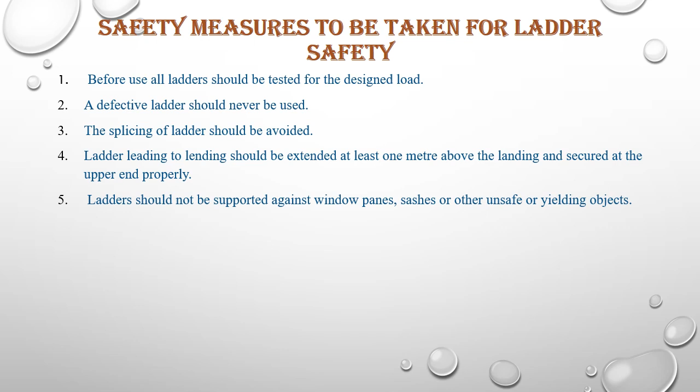Ladders should not be supported against window panes, sashes or other unsafe or yielding objects. When ladders are used in public walkways, a suitable barricade should be provided. While using a ladder, one should not lean sideways more than 30 cm. While ascending or descending, the user should face the ladder. To prevent slipping, a ladder should be placed so it does not make an angle lower than 75 degrees with the ground.

The last one: the metal ladder should not be used around electric circuits or equipment. So these are some of the important precautionary measures to be taken for ladder safety.

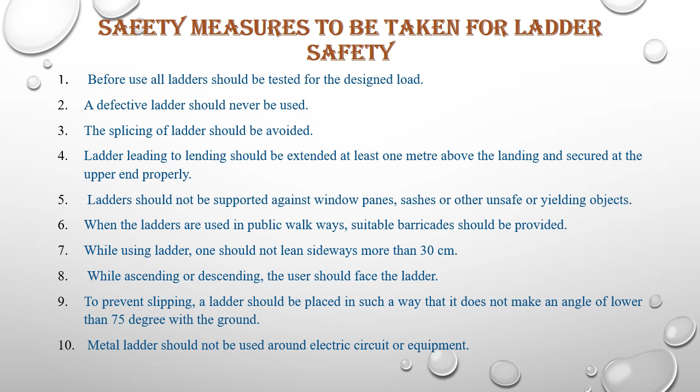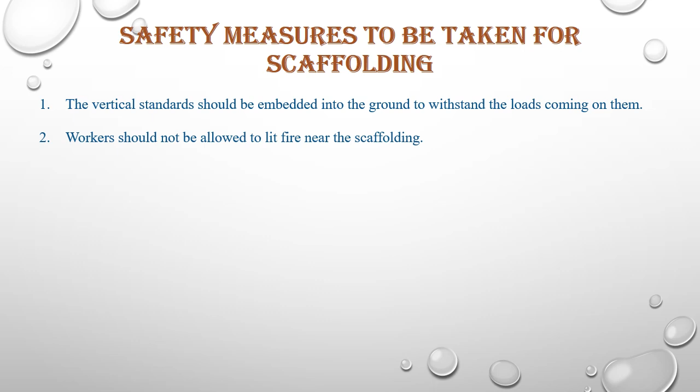Next, safety measures for scaffolding. The vertical standard should be embedded into the ground to withstand loads coming on the scaffolding. Workers should not be allowed to light fire near the scaffolding. The boarding over which the mason sits should have sufficient width and strength to take the load of workers and building materials needed for immediate use. Various stages of construction may be erected at convenient heights. The putlog should be inserted sufficiently deep into the wall to avoid sliding.

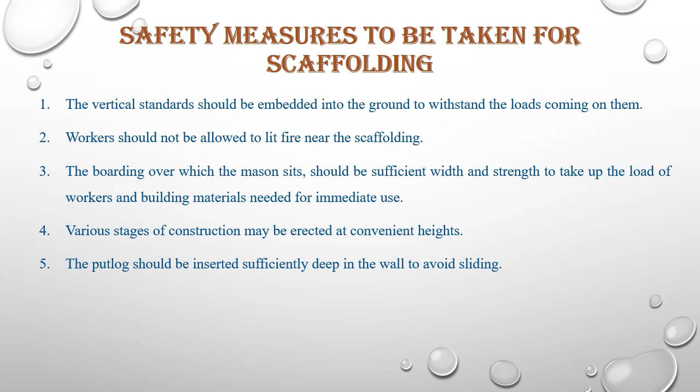The sizes of different members should be properly designed according to the load they are supposed to carry. Nobody should be allowed to stand below the scaffolding. Since scaffoldings are not designed to carry large quantities of building materials, only small quantity should be put on it. While connecting ledgers to standards and putlogs to ledgers, lashing should be done securely to ensure safety. When work is over, the scaffolding should be dismantled step by step from the upper side, since scaffolding is a temporary arrangement.

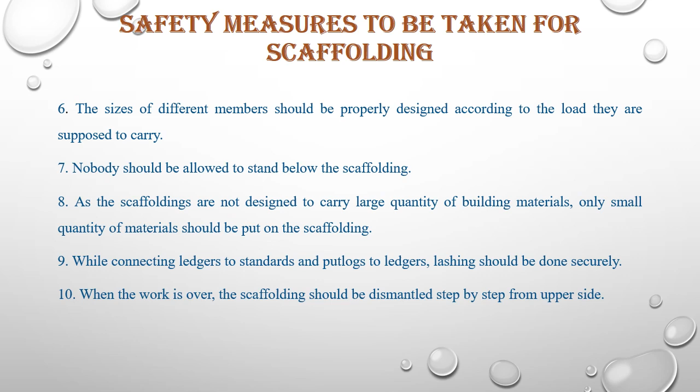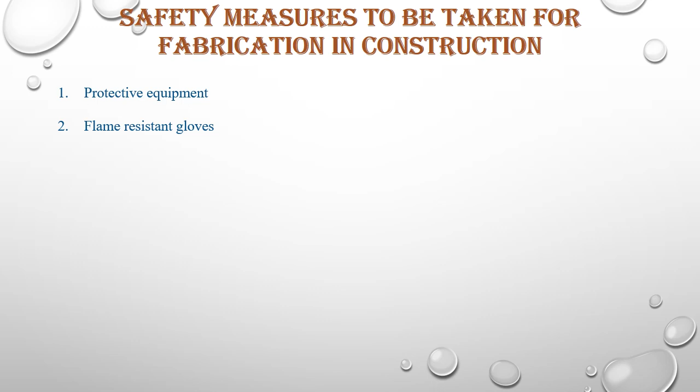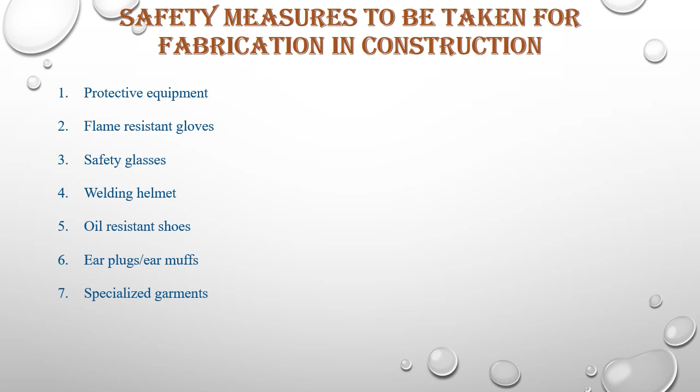These measures should be taken while working on scaffolding. Next, safety measures for fabrication in construction: protective equipment should be provided, flame resistant gloves should be worn, safety glasses should be worn, a welding helmet should be used, oil resistant shoes should be worn, earplugs or earmuffs should be used, and specialized garments should be used depending on the nature of the fabrication work.

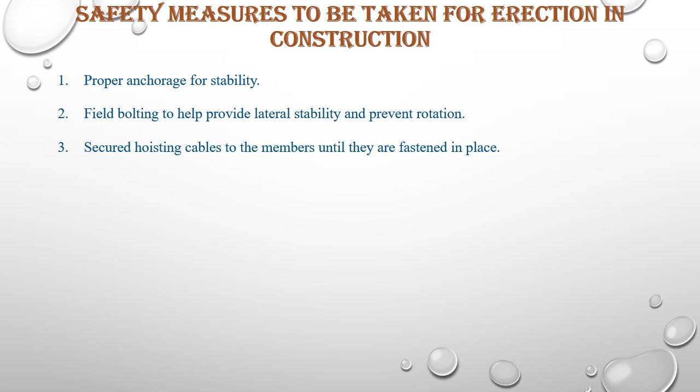Next, safety measures for erection in construction. While erecting steel structures, the following precautions should be taken: proper anchorage for stability, field bolting to help provide lateral stability and prevent rotation, secured hoisting cables to members until fastened in place, clearing of access roads and pedestrian or traffic management, enough drained compacted space to move and stage equipment and supplies, all walking surfaces kept clear of tripping and impalement hazards, and overhead protection to prevent objects and debris from falling on workers.

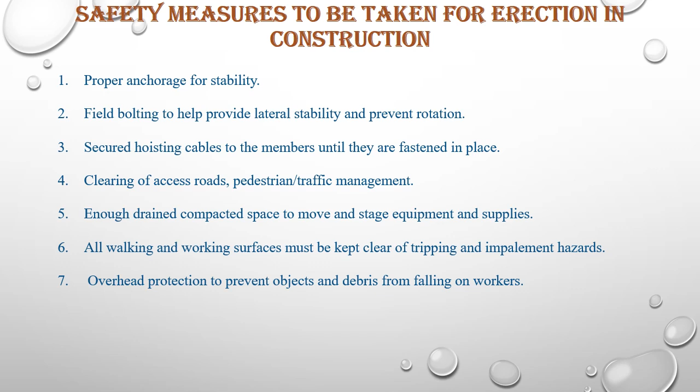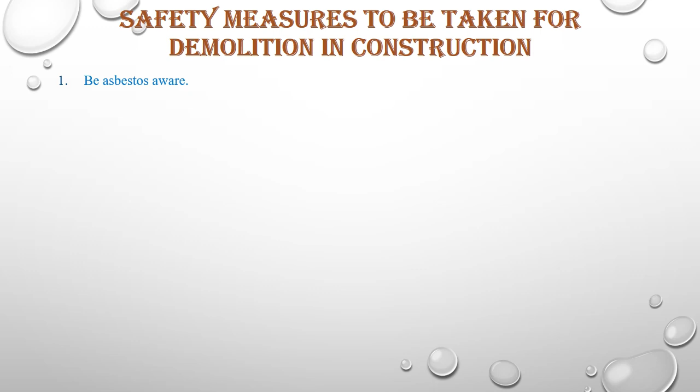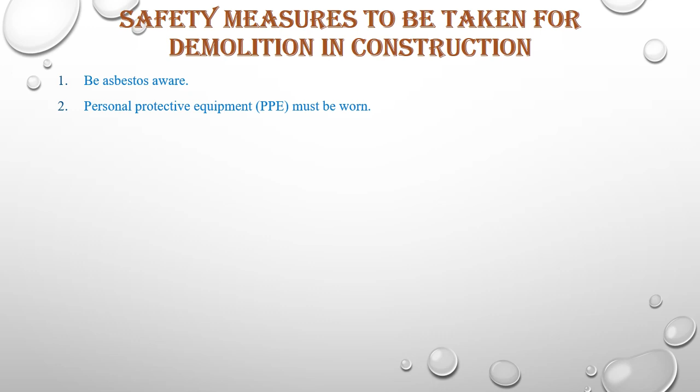Next, safety measures for demolition in construction. First, be asbestos aware: demolition and refurbishment asbestos surveys and subsequent removal of licensed asbestos must be carried out before any demolition work takes place. Second, personal protective equipment (PPE) should be worn. Third, prevent accidents through training, qualification and experience of employees.

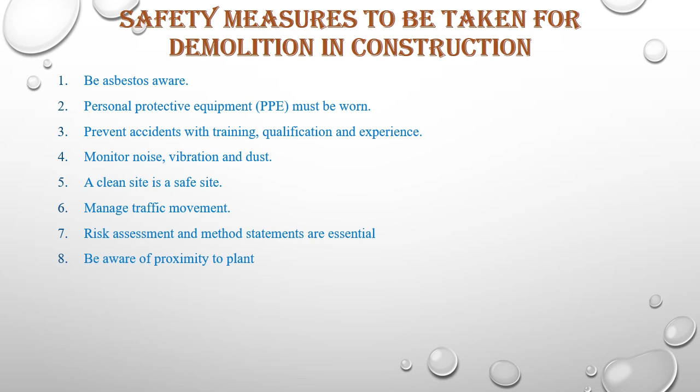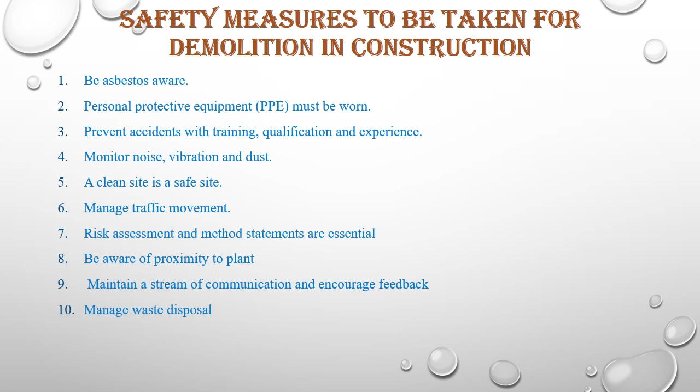Monitor the noise, vibration and dust while working. A clean site is a safe site, so first of all clean the site. Manage the traffic movement there. Risk assessment and method statements are essential in case of demolition works. Be aware of proximity to the plant. Maintain a stream of communication and encourage feedback among employees. And lastly, manage the waste disposal at the demolition site. These are some important safety precautions to be taken while engaging in demolition.

The previous year university question from this portion is: discuss the measures to ensure safety in construction, asked for 10 marks. The answer should include different measures to ensure safety in construction. First write a brief note on safety in construction and discuss the general measures for drilling, blasting, excavation, road construction, storage, scaffolding, ladders, demolition area, etc. About 20 points should be listed, with a brief introduction and conclusion, to get the full 10 marks.

The second question is: what are the measures to ensure safety in road construction? List any 10 different measures that ensure safety in road construction. First state what safety is, then state the importance of safety in construction, and thereafter list the different measures to ensure safety in road construction.